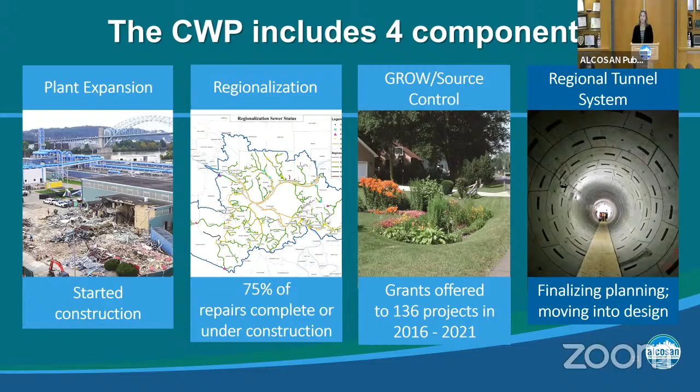So negotiated into the modified consent decree is opportunities for adaptive management, which means that ALCOSAN can adjust the investment between components that I just discussed based on new information as the plan implementation progresses. Proposed projects must be able to meet equivalent combined sewer overflow control performance to be approved by the agencies to swap out the projects that have already been approved.

ALCOSAN negotiated the modified consent decree to spread the cost of compliance over a longer time frame. Following the submission of the wet weather plan that estimated the full compliance cost to be around $3.6 billion, ALCOSAN negotiated the modified consent decree, which managed affordability concerns by spreading the cost over a longer time frame. The modification split the implementation into 2 major phases.

The first phase is the $2 billion Clean Water Plan, which must be complete by 2036. The second phase will be developed beyond 2036 based upon post-construction performance monitoring of the projects implemented in the first phase. In contrast, the original consent decree mandated completion of the entire $3.6 billion by 2026. With the modified consent decree and the Clean Water Plan, it's a $2 billion plan, and we got 10 more years till 2036.

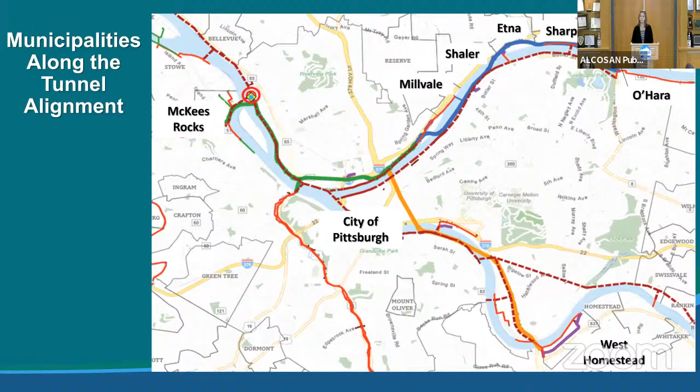So I just want to reiterate, the 537 special study is a planning level document that is based on the Clean Water Plan and the preliminary basis of design report for the regional tunnel system. This study does not provide, evaluate, or approve the specific details of the tunnel system or the wet weather pump station. These will be addressed through subsequent design and permitting processes. Additional public engagement will occur during the detailed design phases of each project.

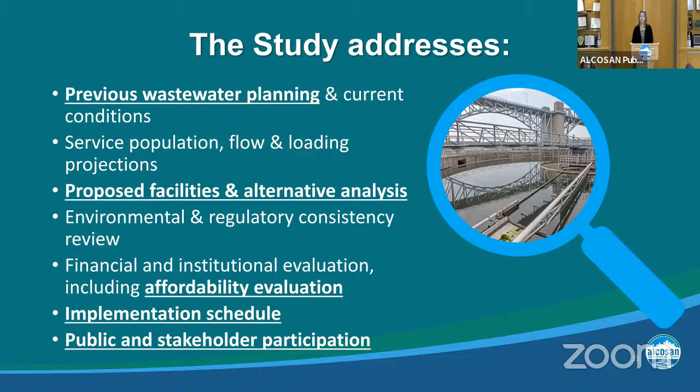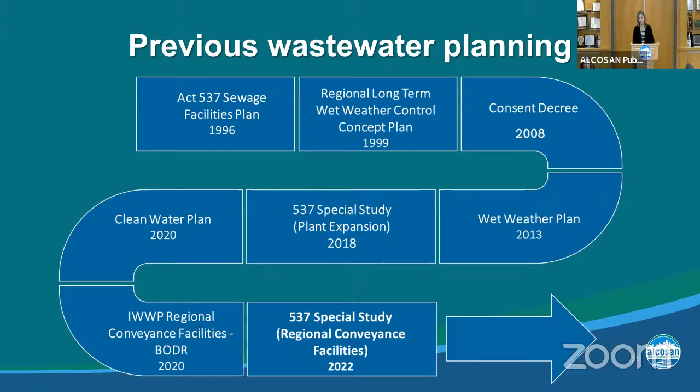So today we will go over a few highlights associated with the underlying items on this slide. I just want to point out again that the full details of the plan are available on our website, as well as a companion document. And then also point out that ALCOSAN has been preparing and updating wastewater plans since 1996. And so this 537 plan special study for the regional conveyance systems is just our most recent effort, as can be shown on this flow diagram. So now I'm going to turn the presentation over to Mike Litchney to talk about some specifics.

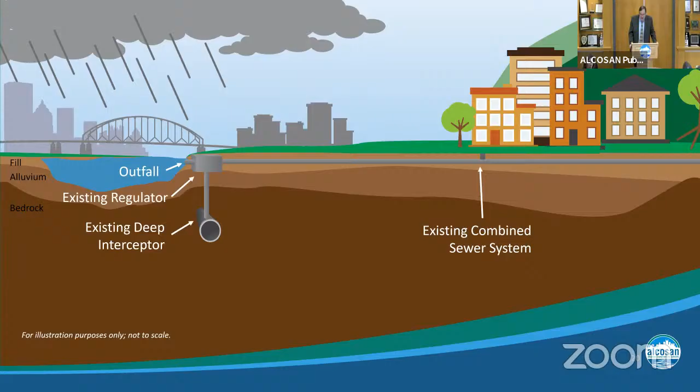Prior to the construction of the ALCOSAN system, all sewage went directly into the rivers, no treatment. Changes to the Clean Water Act in the 1990s, including the EPA CSO policy, required municipalities and wastewater treatment authorities to capture significant amounts of additional wet weather sewage flow and limit discharges and overflows to the rivers.

The proposed regional tunnel will capture the combined sewer overflows and will reduce annual discharges of sewage by over 7 billion gallons. Now, how will ALCOSAN accomplish this? New regulators will be constructed on municipal combined sewer overflows and will capture the sewage prior to discharging to the river. The regulators will send the flow through a consolidation sewer and thence to a drop shaft that will send flow to the regional tunnel and then to the ALCOSAN treatment plant for treatment.

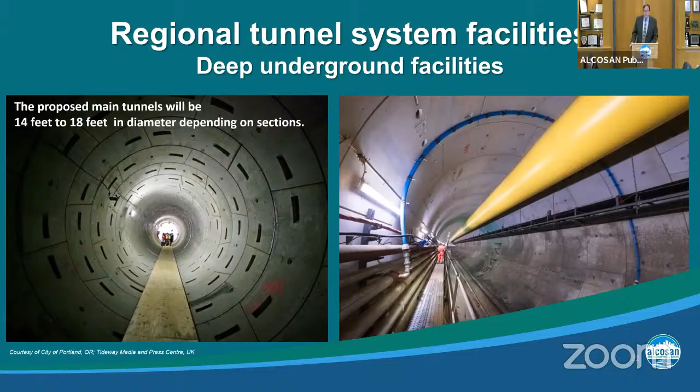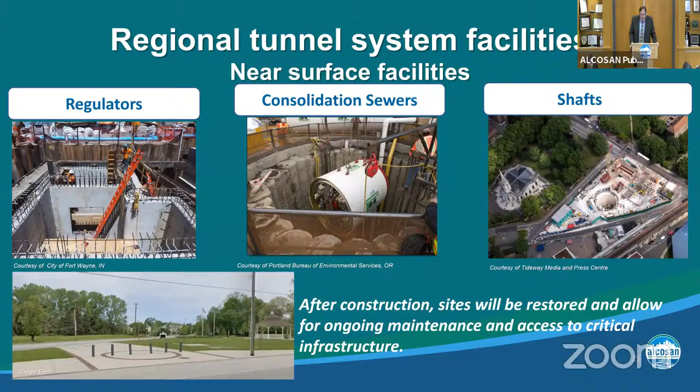The plan includes approximately 45 regulators and approximately 4 miles of consolidation sewers. The top three figures show facilities as being constructed. Following construction, the sites will be restored to original or better condition and look similar to the photo on the bottom.

This figure shows the regional tunnel system as currently proposed. The tunnel system will be constructed as 3 projects. The Ohio River Tunnel, or ORT, in green. The Allegheny River Tunnel, or ART, is shown in blue. And the Monongahela River Tunnel, or MRT, is shown in orange. These projects will be phased and will need to be completed by 2036 to comply with our consent decree. The tunnel, when completed, will flow to a new 120 MGD wet weather pump station located at the ALCOSAN treatment plant.

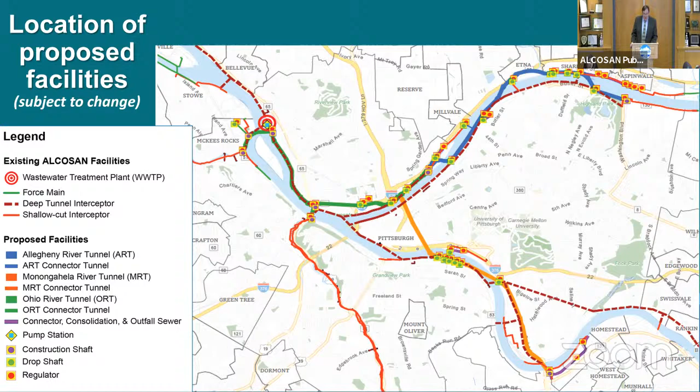The location of near surface facilities, drop shafts and regulators, are shown as squares on this figure and will be constructed on large municipal overflows. The location of near surface facilities is largely fixed by the location of these large overflows. In conjunction with the ALCOSAN wastewater treatment plant and other flow management and reduction improvements, the regional tunnel will reduce sewage overflows by approximately 7 billion gallons per year. The newly constructed system will also stop sewage overflows to sensitive areas such as riverfront parks, marinas, recreational areas, boat launches, and areas near drinking water intakes.

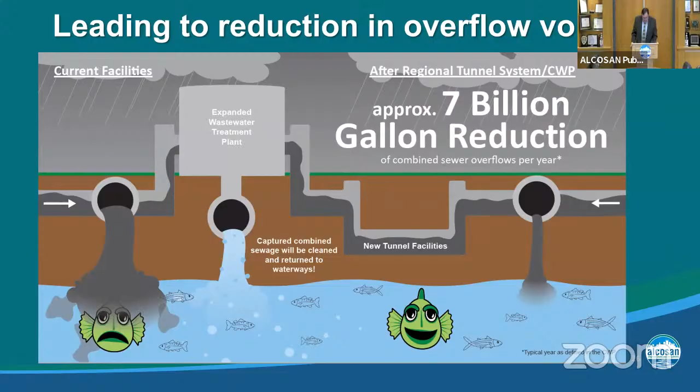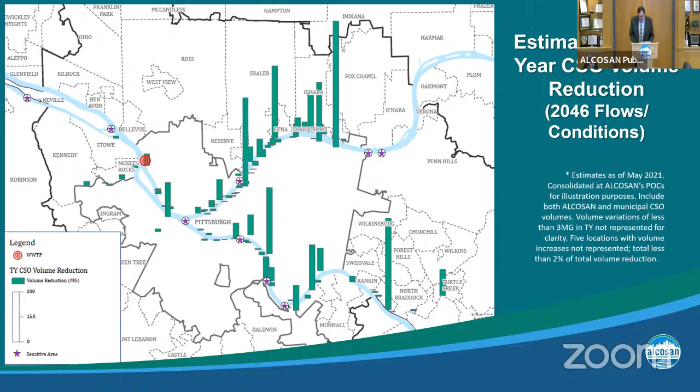I'm going to turn it back over to Kim, and she's going to discuss the alternatives analysis. Thank you. Thank you, Mike.

So the proposed facilities that Mike just discussed were selected based on extensive work. The study summarizes the extensive alternatives analysis conducted as part of basin planning, the ongoing flow reduction program, as well as most recently preliminary planning. This graphic illustrates the process, which involved the evaluation of over 20 system-wide alternatives.

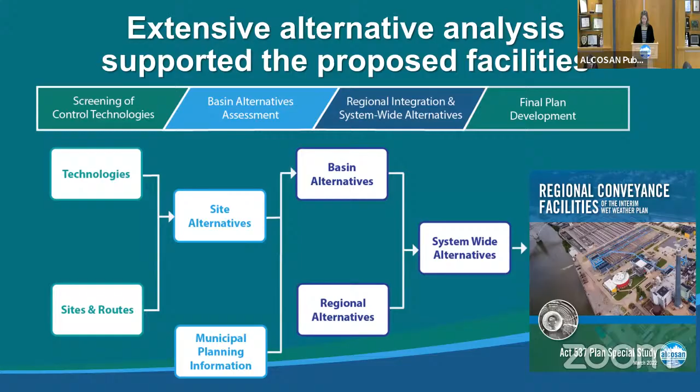So here is our implementation schedule. The proposed regional tunnel system schedule is driven by the modified consent decree. The implementation of the tunnel system will span 15 years and must be completed by 2036. There is about a year after construction that will be needed for commissioning and startup of operations.

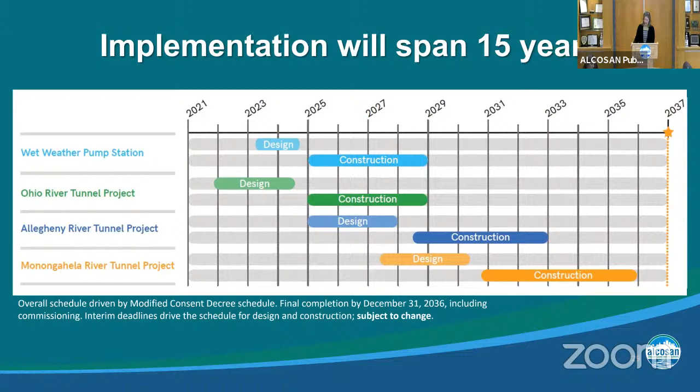The first projects are the Ohio River Tunnel and the wet weather pump station. The design for the Ohio River Tunnel started late in 2021, and it will take over 2 years to complete the design. Construction of the Ohio River Tunnel is anticipated to start in January of 2025 and last through the end of 2028. Operations of the ORT will effectively start at the end of 2029 after the commissioning and startup phase. And of course, this schedule is subject to change as design and permitting processes progress.

So where are we now? A lot of work has obviously been done to date, and there's obviously a lot more work to do. We have been working with our municipal customers on the special study, and now here we are ready for the official public release of the study as part of the public participation process. So we are asking for comments on the plan to be submitted within the next 30 days so that we can develop the responses and include all of your comments and responses in our final submission to the agencies. We are working towards a goal of submitting the final plan to DEP by either June or July this summer.

So there are multiple methods that you can provide your input on the plan. A reminder, again, that the plan is available along with a short companion document for download or just viewing on our website at alcosan.org. Comments received today will be collected and treated the same as written comments. So you can submit your comments on our website. That functionality will open upon conclusion of this meeting. Email them directly to us at public.relations@alcosan.org or mail them to our office at the address shown on this slide.